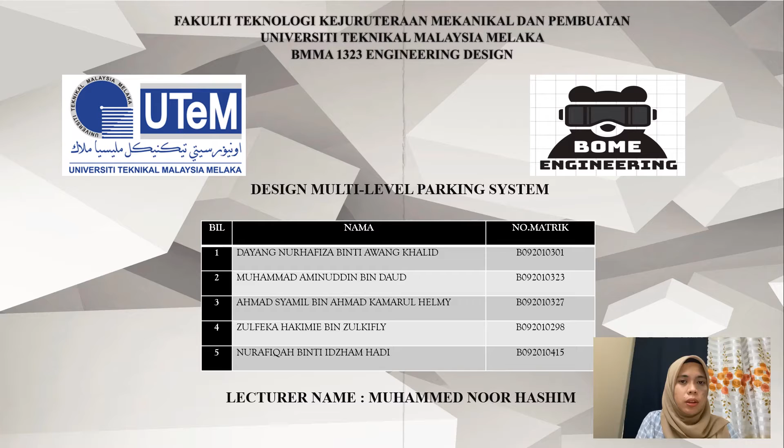In this presentation, we will talk about our project, which is the Design of a Multi-Level Parking System. In this organization chart, I will introduce you to my group members for this project.

Product Manager in Industrial Design is Muhammad Aminuddin bin Daud. Design Engineering is Ahmad Syamil bin Ahmad Kamarul Helmy. Industrial Engineering is Zulfeka Hakimie bin Zulkifly. Sales, Marketing and Purchasing is Nurafiqah binti Idzham Hadi. And Production and Manufacturing Engineering is me, Hafiza binti Awang Khalid.

For the introduction of this project, our project is SafePark Global Parking. Safe Park Global Parking is an automated car parking facility developed with the concept of culture above ground, function underground.

Car parking is still a growing problem with increasing vehicle size in the luxury segment. This is especially true when bearing in mind the confined parking space in parking lots and cities. Our product, the multi-level parking system, is basically an underground parking system specified for high-end apartments or condominiums, because as we know, this kind of building has limited space, especially for parking.

A multi-level parking system is essentially a building with a number of floors or layers for cars to be parked. The different levels are accessed through interior or exterior ramps. Automatic car parking has mechanized lifts which transport the cars to different levels at a certain position. These car parks need less building volume and less ground space, thus saving on the cost of the building. So I will pass it on to the next presenter.

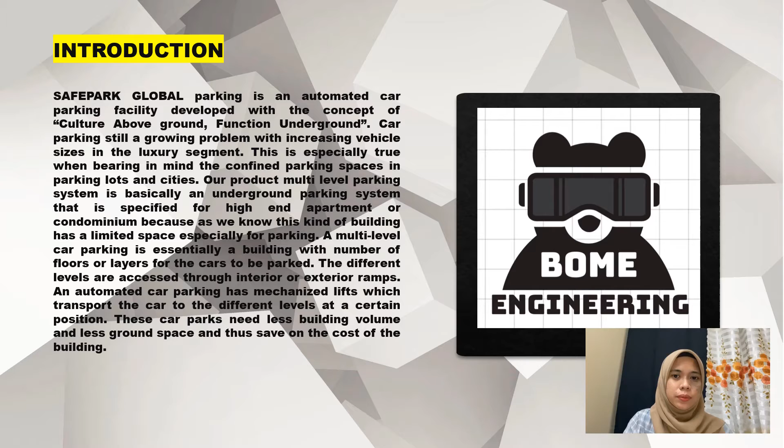The objective of this project is to create a user-friendly and adaptable system that can be implemented in large multi-level parking garages in order to alleviate parking hassle. The ultimate goal is that the idea and planning demonstrated through this system can then be easily upgraded to an actual parking facility.

The purpose of developing the multi-level parking system is to eliminate unnecessary frustration drivers experience as they waste priceless minutes circling the parking garage looking for the optimal parking spot.

In addition, we are designing the entrance of the multi-level parking system to ease people in parking their cars safely without entering the building. Parking garages equipped with the multi-level parking system will have an interface at the entrance that allows the driver to choose their parking spot.

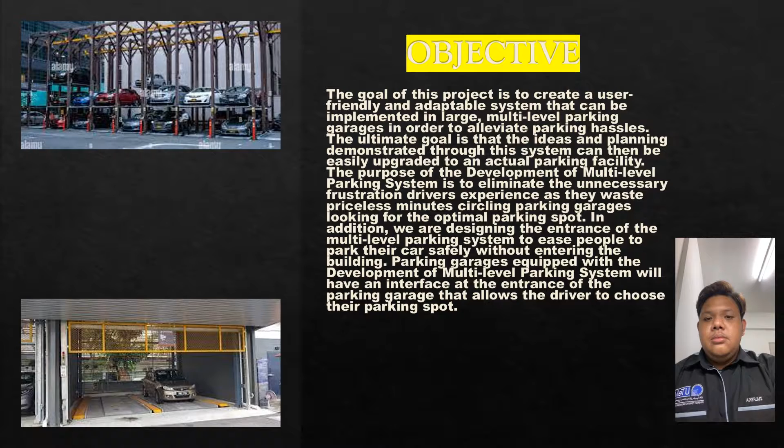I will present the problem statement. Having experienced the frustration of needlessly circling large multi-level parking garages searching for an open spot, and the additional irritation involved in locating that same spot upon return to the garage, I felt a solution was needed.

After all, with urban population on the rise across the country, cities have found the need to expand either outward or upward, and as seen by such buildings, it seems the preferred choice is upward rather than outward. This trend seems to have spread to parking garages as well.

In fact, the latest parking garages consist of as many as 20 floors of circular, winding roadway designed to confuse and intimidate the average driver. I believe I could use my engineering knowledge and modern technology to design a simple and feasible solution for this growing problem.

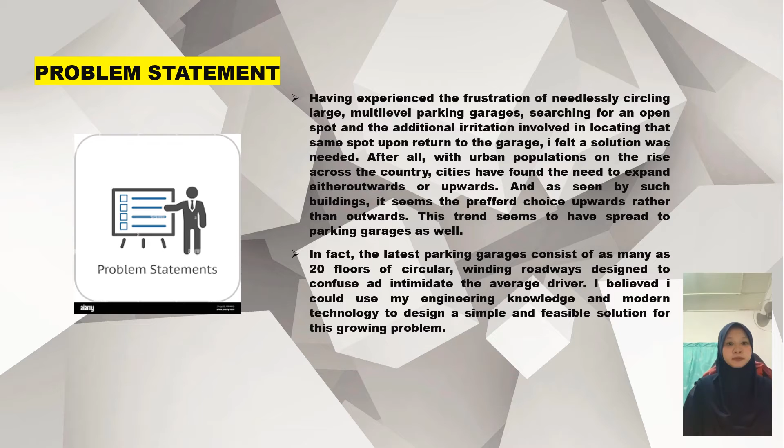So for the problem solution, this is why parking with us is a good idea: we have employed a cashless approach to decrease face-to-face interaction with the general public, making the situation

safe during this pandemic time. We also make the car parking roofed and ventilated to keep the cars safe from unpredictable weather.

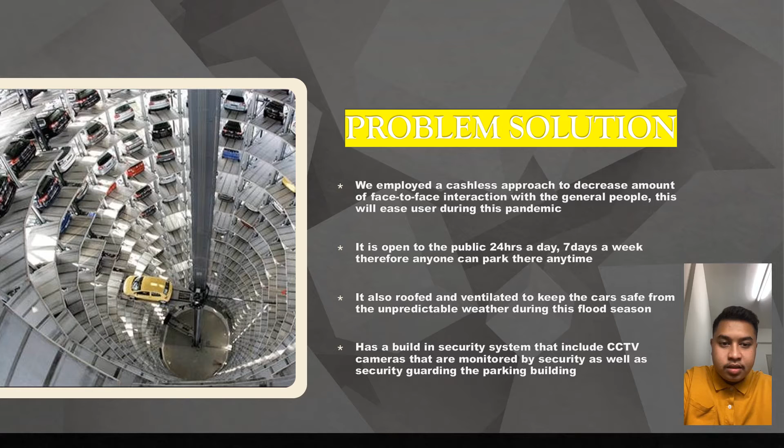It has a built-in security system that includes CCTV cameras monitored by security, as well as security guarding the parking system. It is open to the public 24 hours, 7 days a week, so anyone can park here.

The advantage of multi-level parking is, first, it saves time and space. A typical parking garage is constructed to allow cars enough room to safely circulate in both directions and back out of the parking space.

In an automated garage, this circulation space is not required, and neither is space to open car doors. This helps developers better utilize the space that would normally be used for cars and people to move around, and allows more storage space for vehicles using single-deep or double-deep storage configurations.

The second advantage is lower operation, construction, and finishing cost.

Automated garages allow developers to save on construction costs through reduced excavation, reduced construction time, and lower land cost. A large potential operational saving is in valet or operator salaries, insurance, HR, hiring, and benefit costs, since they are typically not required in an automated garage.

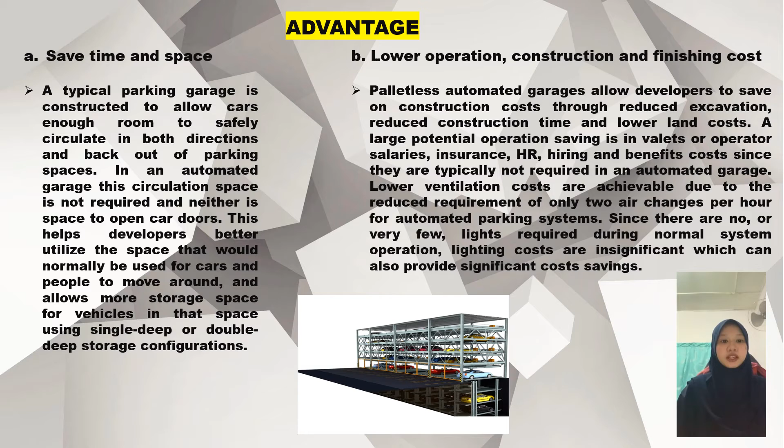Anyone who has driven through a public parking garage knows how time consuming and difficult it can be to find an open parking space—driving up floors, seeking a vacant spot, or waiting for someone pulling out of a space. We have all been there, but have you considered the negative impact this can have on the environment? This environmental impact comes in the form of continuous exhaust emissions.

With an automated parking garage, cars are turned off before they enter the system, so the engine is not running while the car is being stored and retrieved, reducing the amount of pollutants by 60 to 80%.

And the last advantage is increased customer satisfaction. Users of automated garages always park and retrieve their car in well-lit, comfortable transfer areas. Since these are the only areas the user interacts with in an automated garage, it is relatively inexpensive for developers to create a luxury experience for users.

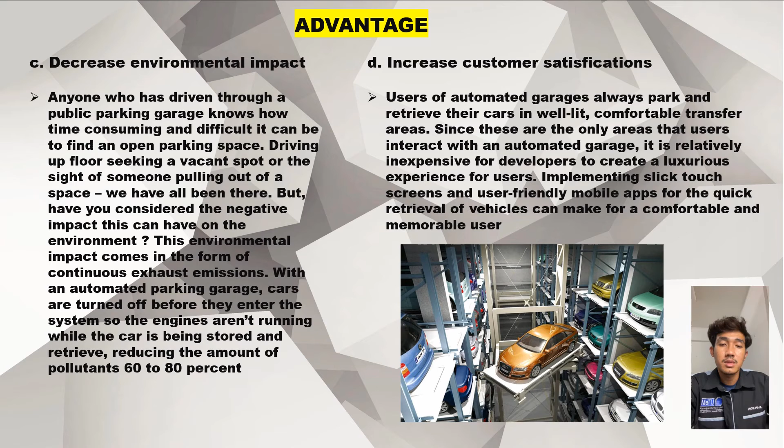The first step is that the customer must bring the car to the front of the conveyor system and manually drive it onto the conveyor system. After that, the customer must put the gear into neutral, and the customer must get out of the car and pick up an access card containing a code for the parking system. After that, payment can be made cashless or by cash.

Next, when the customer wants to take the car, the customer has to put the access card on the sensor.

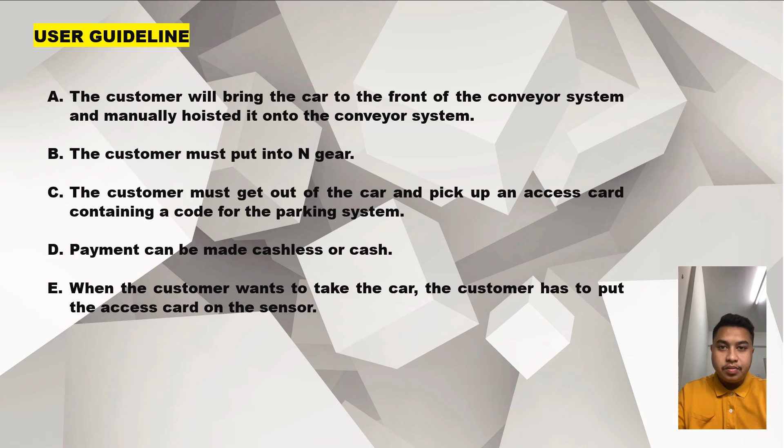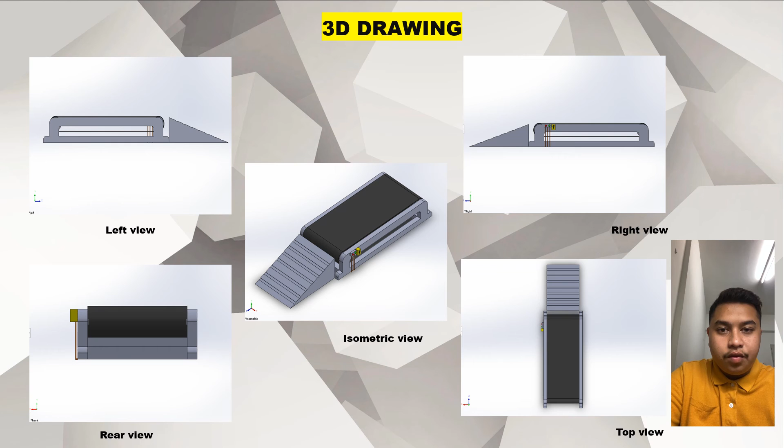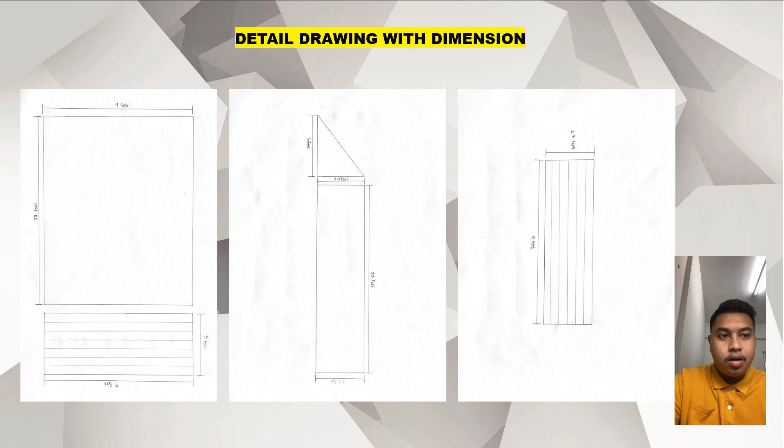So this is the detailed drawing with the dimensions. We have 3 views for the design drawing, which is the top view, left view, and the rear view.

For the conclusion, parking garages that automatically store and collect automobiles are emerging as a potential solution to the parking issue. They are, however, sophisticated systems, and there have been some serious incidents using such garages. Many of these are related to software and customized safety considerations. Verification approaches are used to build the software design for an automated parking garage. This design satisfies a plethora of safety standards.

We give an architecture that allows you to separate and apply safety factors with organized parking features that appeal to a wide range of seasonal and everyday public users. As a result, we present a high-level overview of the safety aspects and validated additional features to enable all-around automated multi-level parking. Thank you.